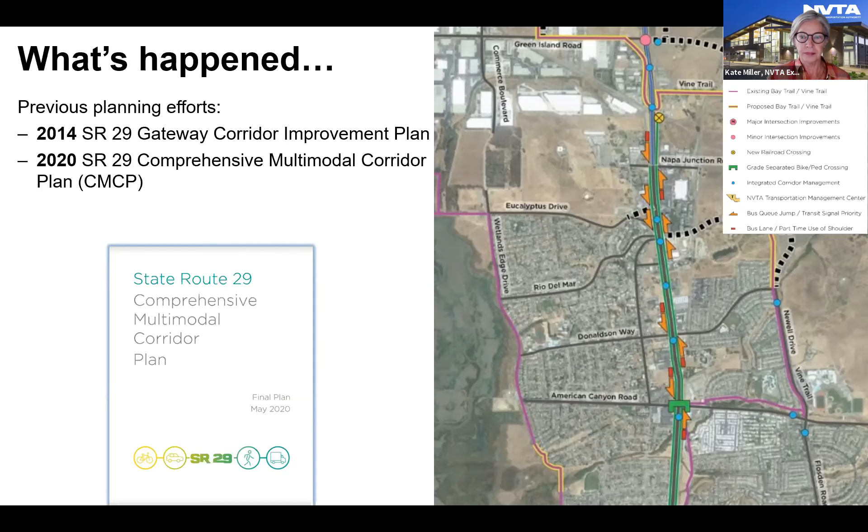Thank you, Kate. Hopefully everyone can hear me okay. Can you hear me okay? Yes, we can. Wonderful. Thank you, and thank you, Kate, for that introduction.

I'm actually currently on location here in Portland, Oregon, presenting American Canyon on a national stage at the City Manager Conference, talking about our sustainability efforts and sharing our community story with many other interested parties throughout the country. But this is such an important topic that I wanted to make sure I was available to at least provide some introduction. Our Public Works Director, Erica Smithies, will be with you for the remainder of the presentation to answer any questions that may come up. But I wanted to share two important points beyond what Kate had already mentioned.

The first is that all of the alternatives folks will see tonight provide an exciting opportunity for multimodal improvements, in particular bicycle and pedestrian improvements on both sides of Highway 29. The fact that American Canyon residents cannot walk north and south on the highway in a safe manner is really abhorrent at this point. Modern communities all have sidewalks and bicycle paths, and we really need these improvements on both sides of the highway. Safety is an issue, and all of these alternatives provide those pathways north and south on the highway, which is an exciting development as we look at projects moving forward.

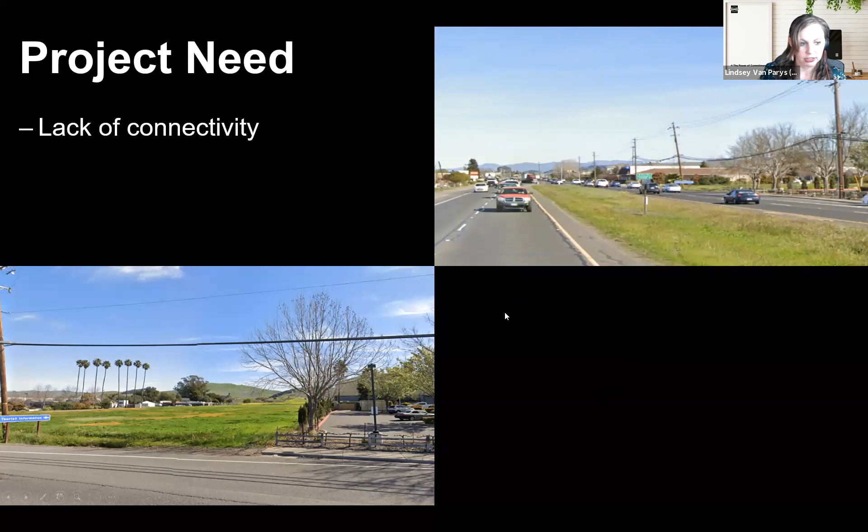Wonderful, thank you. Okay, so let's talk a little bit about the purpose and need of the project and some of the objectives. The project need: there's a lack of connectivity for all users. We've got gaps in sidewalk closures, as you can see on the right-hand side there. We have some challenges with roadway connectivity, and there's a lack of low stress routing options.

Low stress is a term that we engineers use for evaluating and looking at how a cyclist would feel on the road. With the volume of traffic, the proximity to moving traffic, and just the lack of facilities, there is a lack of low stress routing options for cyclists.

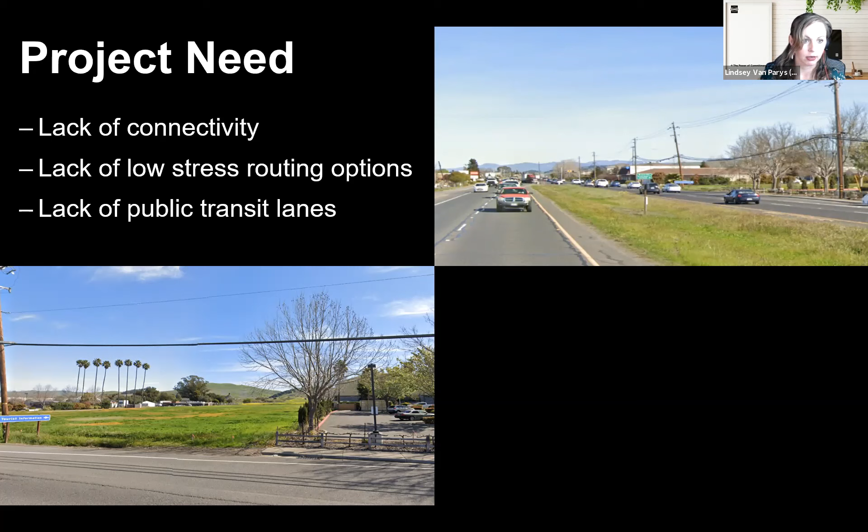There's also a lack of public transit access lanes, which leads to non-reliable transit in terms of travel time. So travel time reliability is a challenge because of the operations, lack of aesthetic benefits, regional traffic congestion, and constraints at the intersection that lead to significant queuing and stacking and impact that congestion.

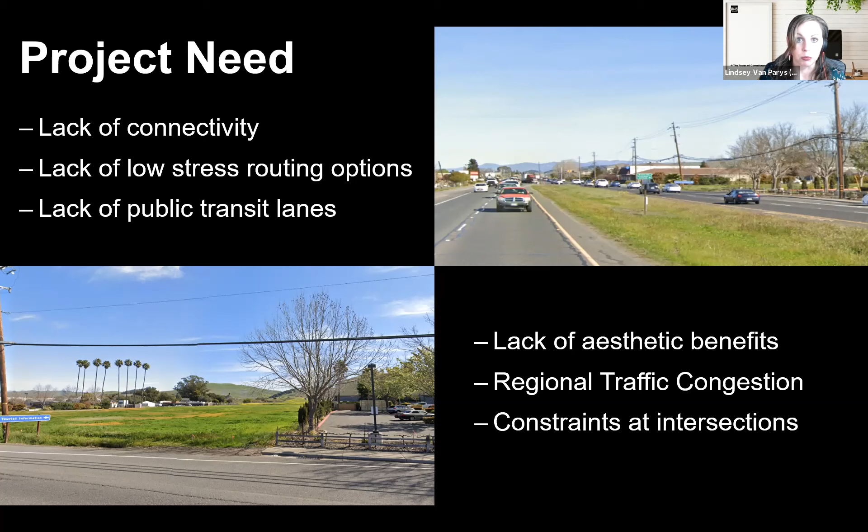Some of the objectives that have been set in the development of this project are improving mobility for all users, and improving safety for all users through Vision Zero. That's something Kate mentioned briefly at the beginning, talking about safety.

Vision Zero is a term that's been coined by the Federal Highway Administration and also a lot of other jurisdictions, including Caltrans, and that is the push to get to zero deaths and zero serious injuries on our roadway systems. So that is, again, that critical focus on safety.

Eliminate the overhead utility poles, which goes back to that aesthetics piece, and then further improving the overall corridor aesthetics, really making it a focal point and be the main street of American Canyon.

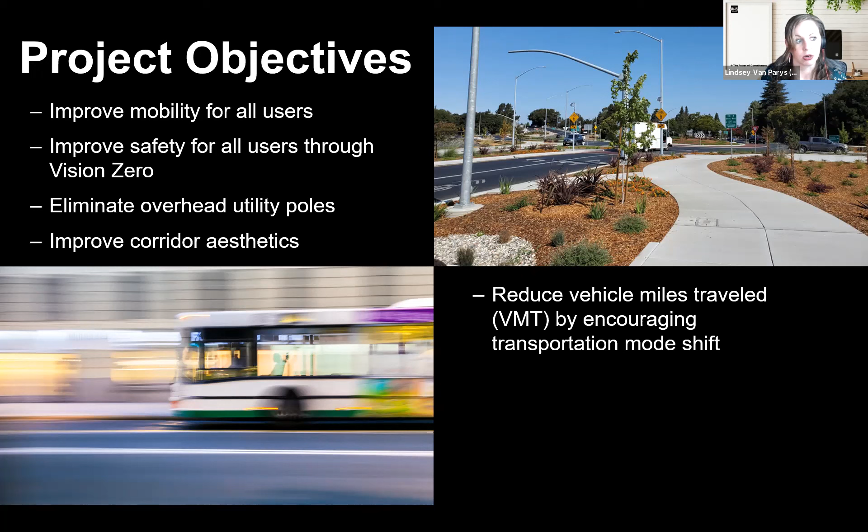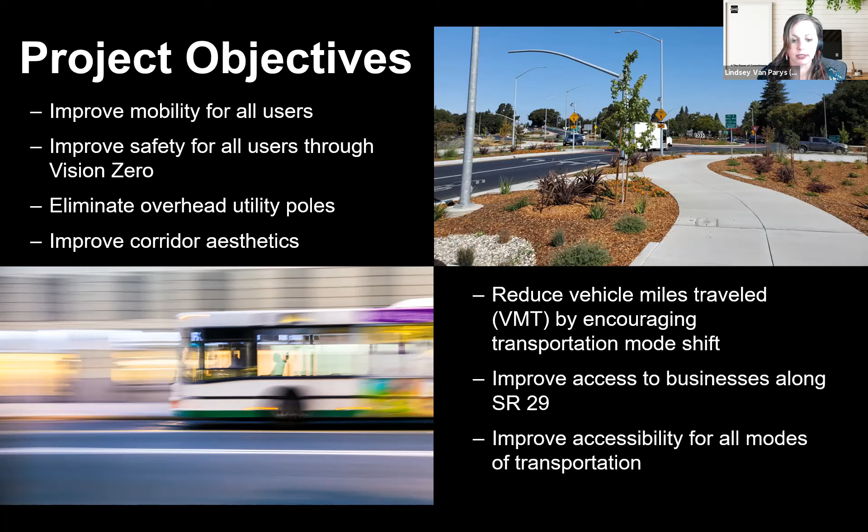Reduce vehicle miles traveled by encouraging transportation mode shift, so getting people out of their cars and using bikes or sidewalks to run errands for lunch, or use transit and then bike and walk the rest of the way. Improve access to businesses along SR 29 and improve accessibility for all modes of transportation.

Our project timeline and process: there was this project identification and development phase, which Jason and Kate touched on with all of these prior plans. Now we're in the project initiation phase, where we have looked at some technical components and performed technical studies.

Through those technical studies and understanding the needs and project objectives and looking at ways that we could meet those, we did an alternative development, looking at the various different alternatives that could potentially meet the purpose and need.

And then we are here at the draft project study report, where we have all of the preliminary technical studies done. We've identified the alternatives that can move on to the next phase. And then we'll move to the final project study report.

Now, in the project study report, we are not rejecting alternatives, we're not recommending an alternative. We're just saying these are viable alternatives and should have further evaluation. I'll talk about that further evaluation at the end of the process, which are the next steps. But we are at the draft project study report at this point.

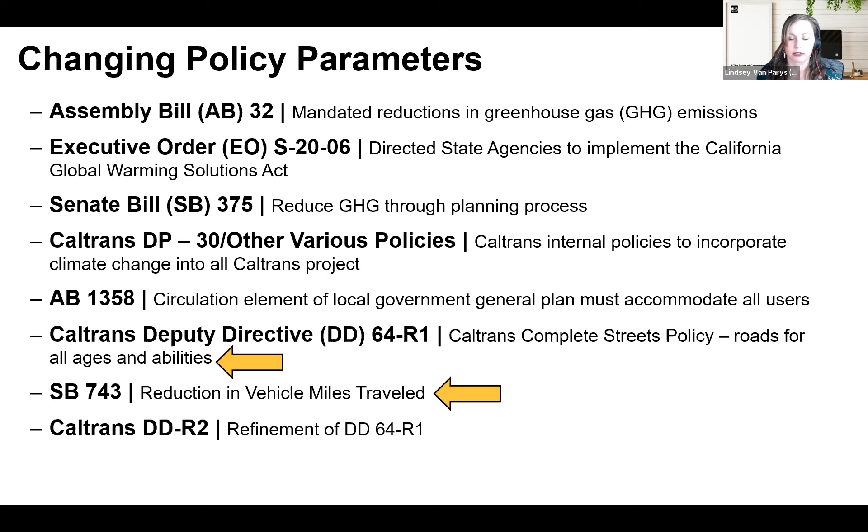So the reduction in greenhouse gas emissions, requiring circulation elements to accommodate all users, Senate Bill 375, reduce greenhouse gases through planning processes. So it's really just the next step in that.

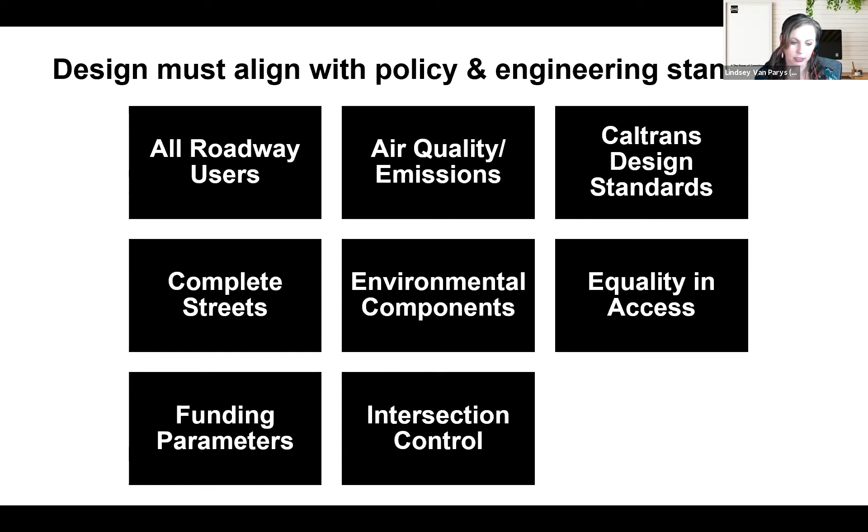Again, the funding parameters, intersection control—that is another piece of what does the intersection look like, and meeting the policies there. Caltrans has an intersection control evaluation policy that we went through on this project, which requires us to look at signals, stop control, which is not applicable in this case except on some of the side streets, and roundabouts. And then again, Vision Zero for safety.

Then other design parameters that we looked at that are really specific to this corridor are, again, part of that purpose and need, but access to local businesses, aesthetics, design vehicles—so can the big trucks that are going down there make it through our designs. Railroad requirements: there is a railroad running right adjacent to our improvements, and making sure that we're meeting the needs of those crossings. Right-of-way impacts: there is quite a bit of right-of-way out there today, but just making sure that we're taking into account any potential impacts the project may have.

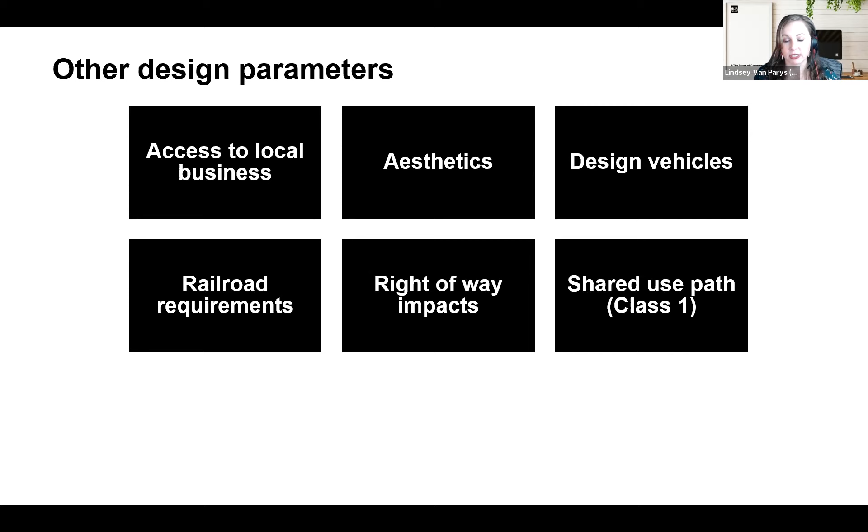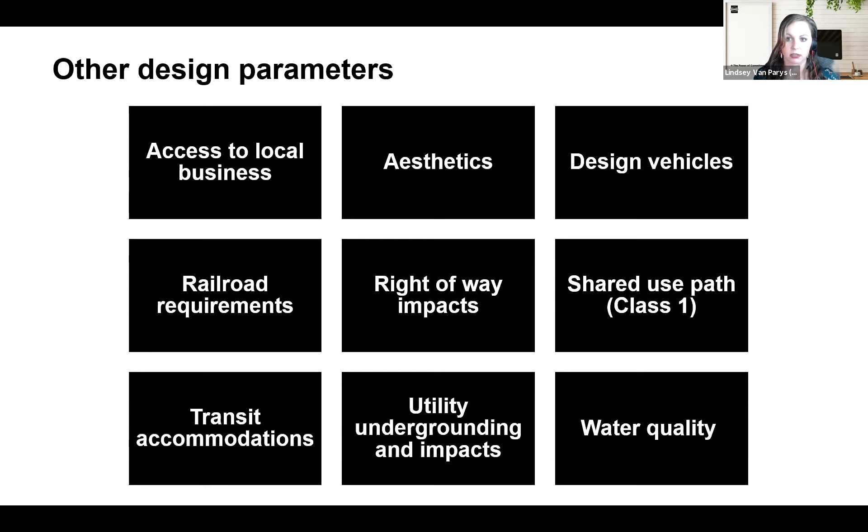A shared use path, or a Class 1 bikeway, based on the number of cars and the speeds on SR 29—we are required to put in a shared use path, which is a wider separated facility that is accessible by both bicycles and pedestrians. Transit accommodations, utility undergrounding—so all of those overhead lines being put underground, which will also tie back into aesthetics, but also looking at what are the underground utilities, are there big transmission lines down there that we can't impact, or different pieces like that. And then stormwater quality is also another key parameter. With any new transportation project, we have to treat the water that runs off the roadway before it gets discharged into our storm drain systems.

Now, safety is a big push, and some of the safety statistics on SR 29 within our project area were surprising to me. May not be surprising to everyone, but the number of fatal and injury collisions were 2 times higher than the statewide average within the corridor, and 84% higher than the statewide average for total collisions. So safety was one of the really key parameters here to reduce these number of fatal and injury collisions and property damage collisions as well.

So let's take a quick look at the alternatives. Our project spans SR 29 through American Canyon, starting at American Canyon Road and ending at Napa Junction Road. Some of the alternatives have some of the same characteristics, and I will point those out. We've got a legend here which gives you a key to what the map below shows.

Essentially, Alternative 1 is providing multimodal improvements, so there is no adding of lanes. It is focused on the multimodal and transit improvements, so maintaining the 4 lanes, but reducing the lanes to 11 feet, which will help with speed control and speed reduction. That will also minimize impacts to right-of-way, providing a separated sidewalk/bikeway in both directions, taking out that landscape median and constructing a paved median with the potential to add aesthetic qualities in there.

Widen the shoulders to 12 feet to allow for part-time bus on shoulder. Reconfigure and improve intersections along the corridor. By reconfigure, they're not major reconfigurations, just adding in additional turning storage, enhanced pedestrian improvements, and looking at the signal timing to revamp it to make it flow a bit better. And then construct a pedestrian undercrossing just south of Napa Junction Road.

As we look here, this is a table with a lot of information. Essentially, we are looking at changes. I'll flip back here for these two columns, the existing and the proposed. You can see we're proposing a new signal, or rather an enhanced signal, at American Canyon, Donaldson, Rio Del Mar, Eucalyptus, and Napa Junction.

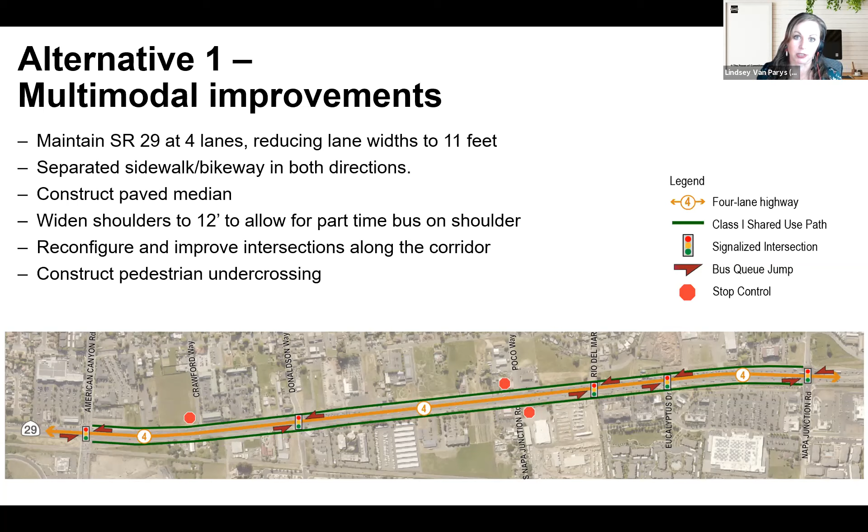And then we're also providing these bus queue jumps at the signalized intersections. What is a bus queue jump? It's essentially a red painted lane that is a bus priority lane, which allows the bus to jump past the line of waiting cars to get through the intersection, helping with that travel time reliability piece of the transit system. And then the enhanced crosswalk markings at every single crossing will improve the visibility of the crosswalks. That is also another opportunity to provide some aesthetic improvements within the look and feel of the roadway corridor.

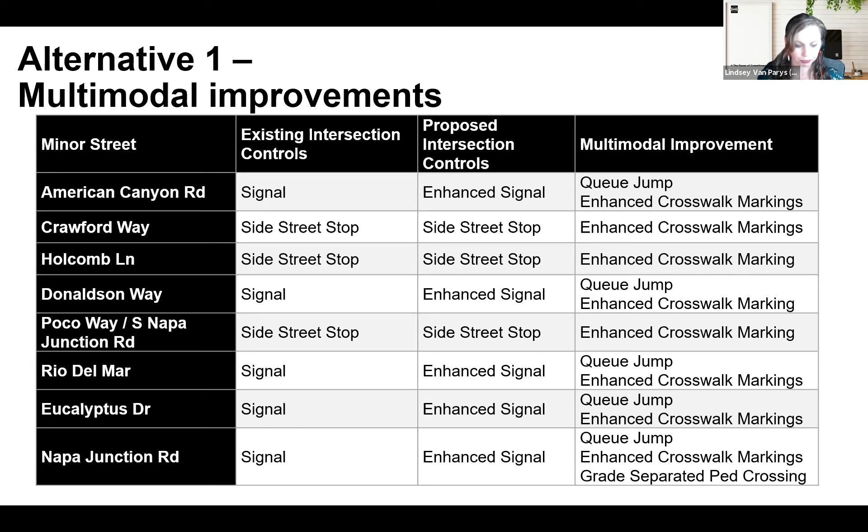Alternative 2 is essentially Alternative 1, but instead of signals, it's roundabouts, potentially a couple more roundabouts. American Canyon Road will remain signalized, and then the rest of the intersections will be converted to roundabouts. Again, it's a 4-lane roadway, reducing the lane widths to 11 feet, providing the separated sidewalk and bikeway in both directions, constructing the paved median, widening the shoulder for part-time use of bus in between the roundabouts, constructing 6 roundabouts, and constructing the pedestrian undercrossing as well.

Putting in a bus queue jump where feasible. Right now, we have identified American Canyon to have the bus queue jump, and then potentially looking at converting one of the lanes to a bus-only lane during certain peak hours. The roundabouts will be 3 lanes, so they will have an extra lane just through that circulating road, and I'll show you that a little bit later, and that is to enhance capacity, but it'll drop back down to 4 lanes after the roundabout and in between the intersections.

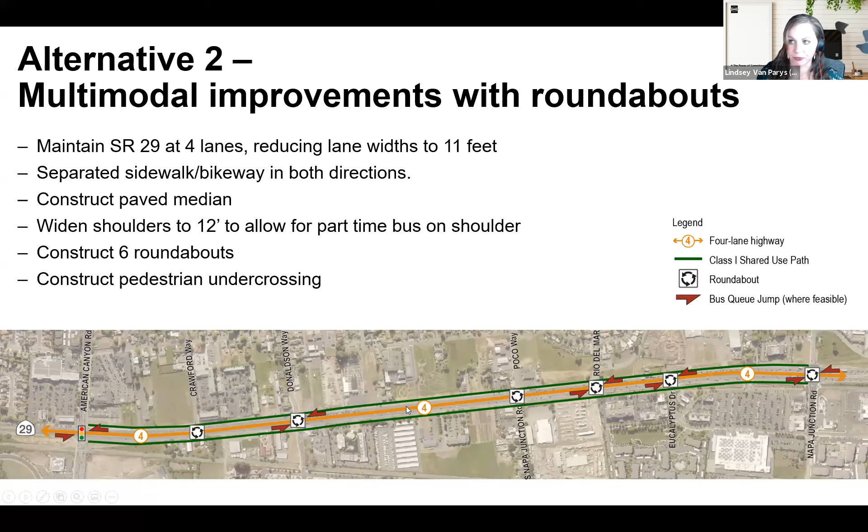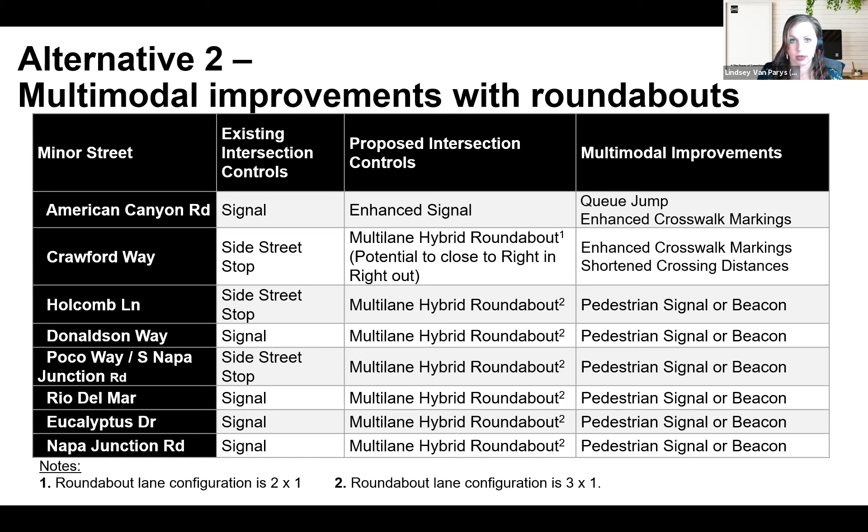Again, we're looking at enhanced crosswalk markings, shortened crossing distances, which is great because we're putting in median islands or pedestrian refuges. So pedestrians only cross portions of the road before, which improves operations, because when a pedestrian hits that signal, they have to cross the entire intersection, where with a roundabout, you only have to cross part of it. We are also looking at putting in a potential pedestrian signal or beacon at the crosswalks to further enhance visibility and safety for all users.

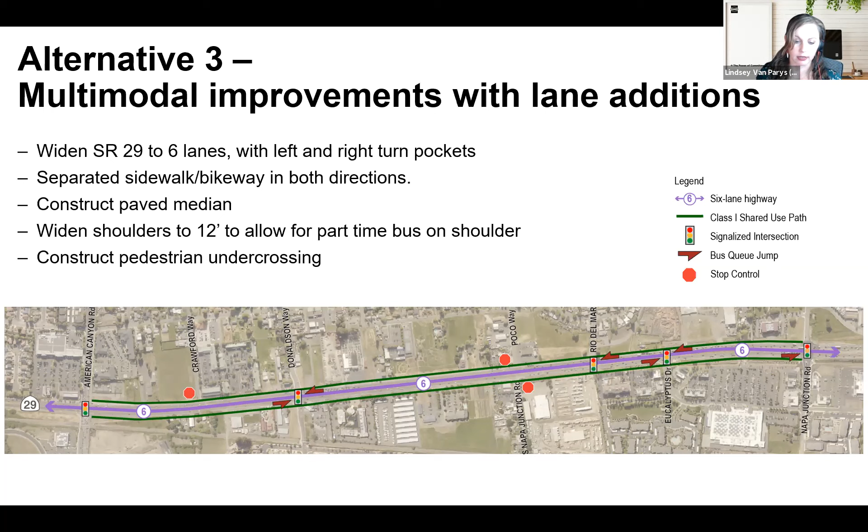Alternative 3 is the multimodal improvements with lane additions. Essentially it's the same as Alternative 1, but widened to have 1 additional lane in either direction on SR 29, and again including the pedestrian undercrossing at Napa Junction. Now this one, when we go back to those funding parameters, the ability to obtain funding to do this is challenged. So that is one thing we have recommended to take into account in the next round of analysis—the ability to obtain the funds to construct this.

Same things as alternative 1, with the queue jumps, enhanced crosswalk markings, and grade separation.

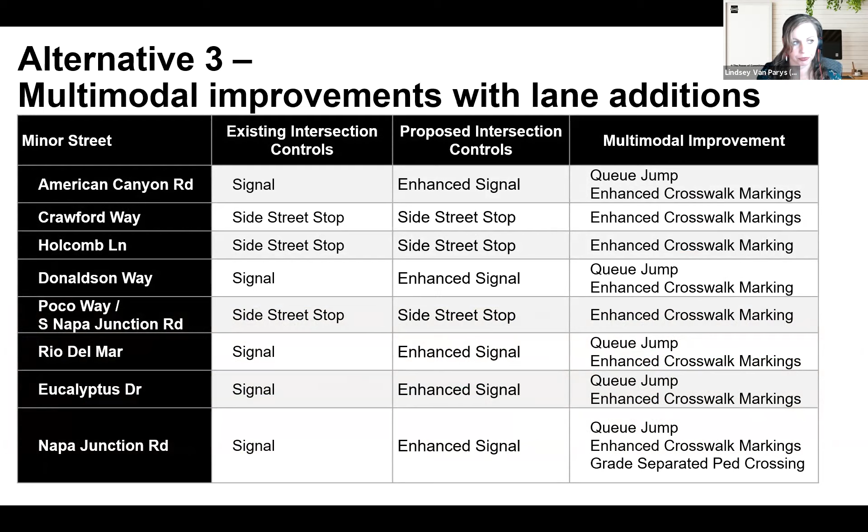Now looking at traffic operation comparisons, starting with vehicle miles traveled. We've got green, yellow, and red representing best, better, and marginal. Number 1 means the most positive advantages, 2 is better than now but not a significant improvement, and 3 is marginal to no improvement or negative. For vehicle miles traveled, the 6-lane alternative allows more capacity and would increase vehicle miles traveled, which is why it has a 3.

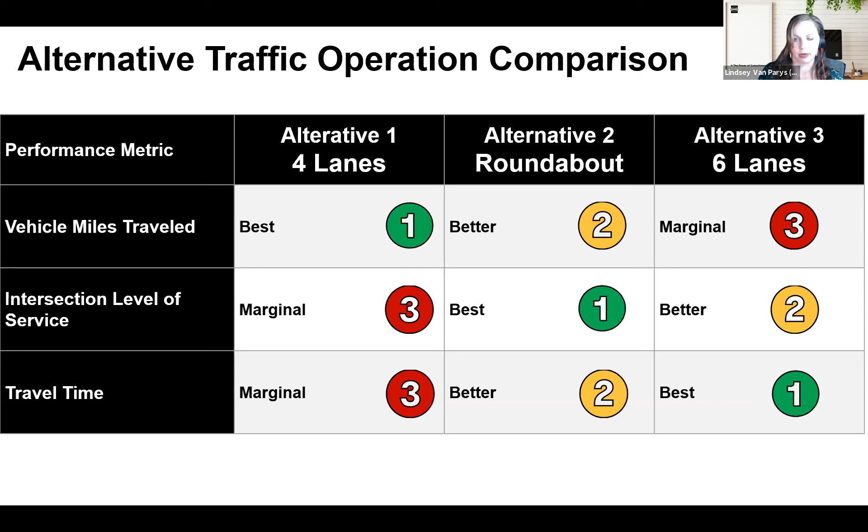Travel speeds: alternative 1 is better, alternative 2 is best, and alternative 3 is marginal.

Pedestrian crossing distances, same as explained earlier. The 4-lane would remain as it is today. Alternative 2 or roundabout would be best because we divide the pedestrian crossing time, while the 6-lane would add a significant amount of crossing distance.

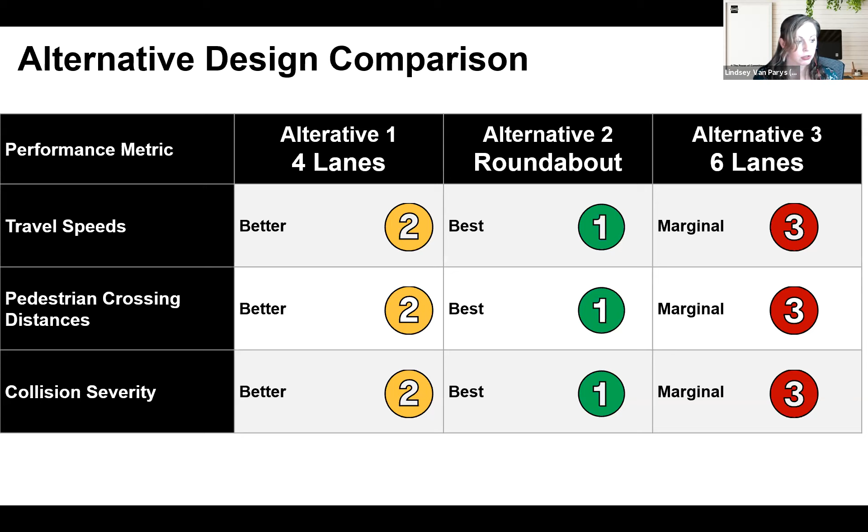Collision severity: alternative 1 would be roughly the same as today, and alternative 2 would be the best—roundabouts reduce broadside and T-bone collisions and reduce collision severity significantly, with about an 40% reduction in overall collisions and around a 80% reduction in fatal and injury collisions. For alternative 3, adding another lane to a signal increases the number of conflict points for both non-motorized and motorized users, increasing the risk for all roadway users and collision severity.

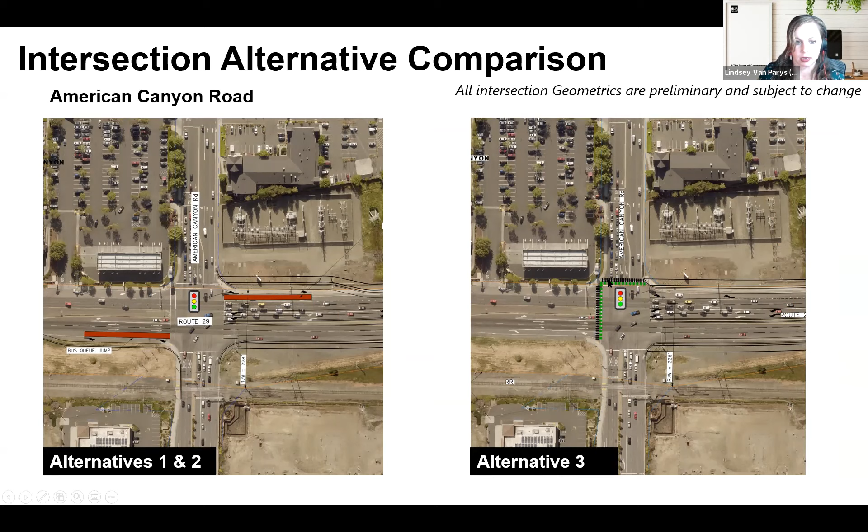This shows a potential example of what an enhanced crosswalk would look like. The green is the bike crossing and the black is the pedestrian crossing.

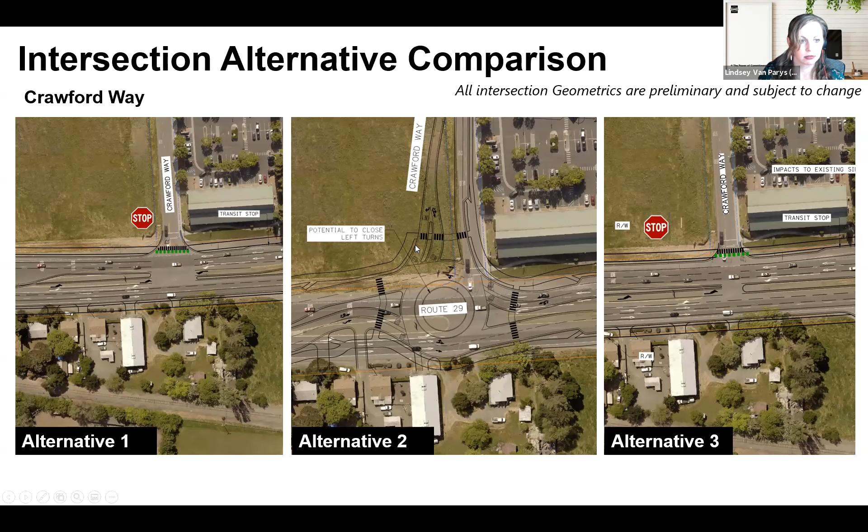This shows Crawford Way. In alternatives 1 and 3 it would be a stop sign. In alternative 2, we were looking at potentially adding a roundabout here, keeping it at 2 lanes through.

And here's our roundabout. It flares out to open up to 3 lanes in both directions—2 lanes coming through, and one being a through-and-right lane. You'll see we've got the right lane separated so that pedestrians have a little refuge there.

But they do cross 3 lanes of traffic on the exit, and it's the same for the approach in the other direction too. We've got the right turn lane, and then the 6-lane alternative, you still have your left lane.

You have your throughs, your bus queue jump, and your right turn lane with the shared use path. And the same here. We did look, because we're widening the roadway, at an option to add a 4th leg of a crosswalk. But during the environmental analysis, we'll need to determine if that is viable or warranted from a pedestrian crossing standpoint.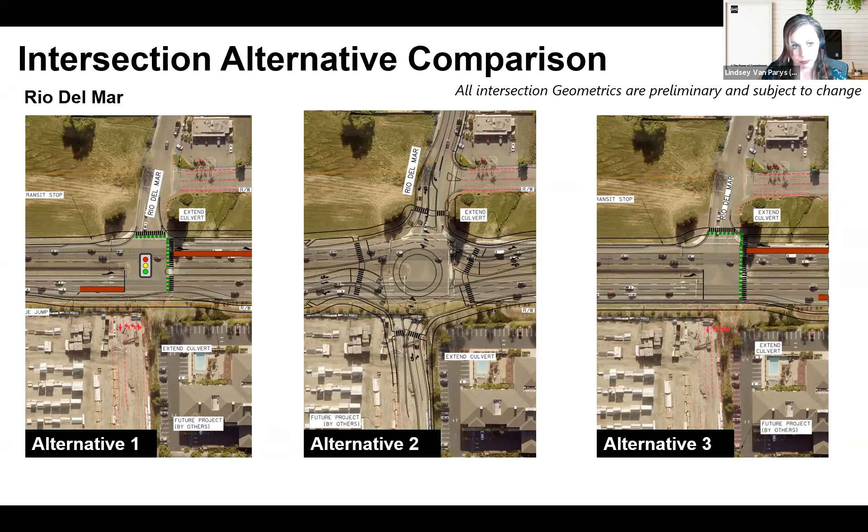Eucalyptus, same as shown here. We've got a future extension by others that would be a future project happening, which is not part of this project. Again, the roundabout and the project construction would end at the yield line at the top of the screen, and the future project would be required to construct the rest of the improvements.

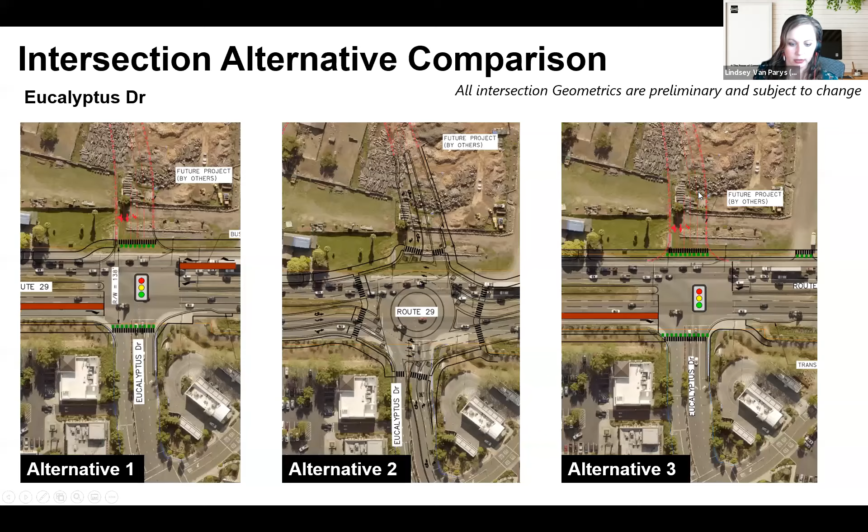Napa Junction Road. This is again the last intersection of the project. We are going from existing conditions on all 3 alternatives and transitioning to the project condition once we get through the intersection, adding the bus queue jumps, adding the enhanced crosswalks, and then adding the class 1 lanes on both sides.

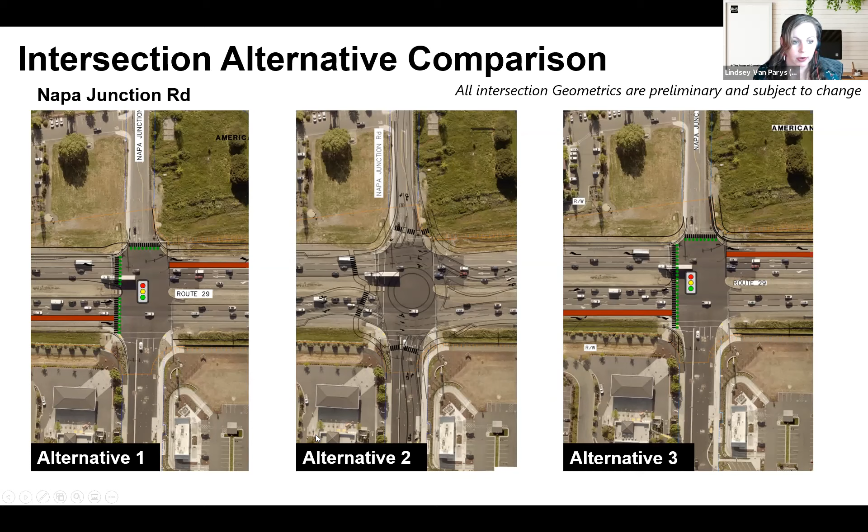The roundabout would also be 3 lanes. And then lastly, all 3 alternatives would have a pedestrian undercrossing. Essentially, the sidewalk or the class 1 shared use path would start dropping down underneath SR 29 and go under SR 29 and back around to provide a grade separated crossing of that intersection.

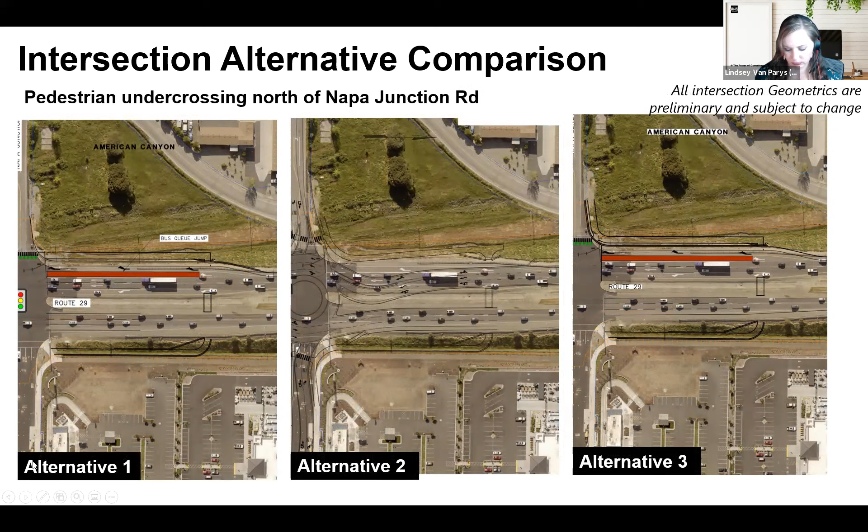No construction funding has been identified yet. The other costs to be incurred are amenities, so any street furniture, enhanced roadway lighting like decorative poles would add costs, environmental mitigation costs, overall long-term maintenance costs. Overall costs are subject to increase with inflation, but also the construction cost index has been fluctuating pretty significantly. So that is a potential future cost, utility costs, and then user costs.

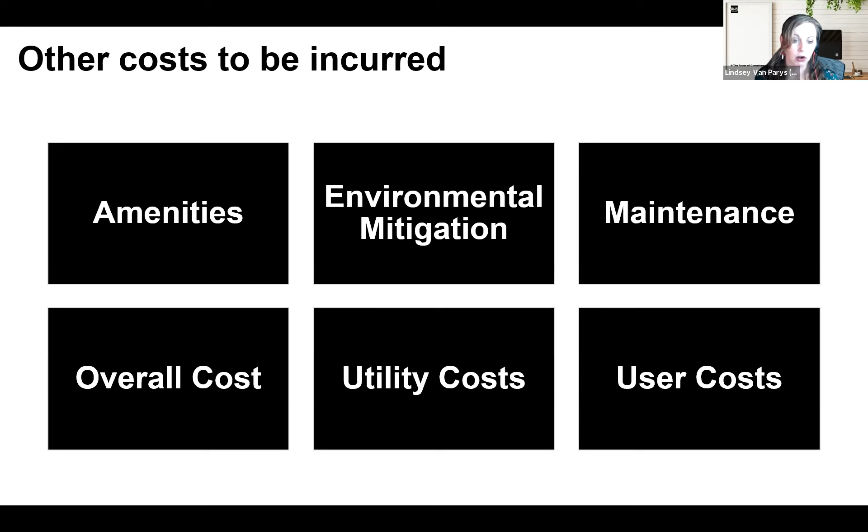What I mean by user costs is there is a cost associated with collisions - the cost to respond with our emergency personnel, the cost to clean that wreck up, the cost to replace the damaged infrastructure. There's road user costs, so what is the time that you spend on the road? There's costs associated with emissions for greenhouse gases and things like that. So there are a lot of other user costs that are factored into the overall life cycle cost of the project.

So next steps, the process and the future timeline. The project initiation phase, which is where we are now, is anticipated to be completed March of 2022. Then it will go to the preliminary engineering and environmental document phase. That is anticipated, if funding is identified and allocated, to be done in spring of 23, but may be delayed based on funding. In this phase, further evaluation and studies will be conducted for these 3 alternatives.

Then a draft environmental document will be circulated to the public. That'll be a 30-day public circulation period where all of the information will be provided as to what the analysis showed. They'll provide a detailed benefit cost analysis, all of that. Then once that has circulated, it will also produce a draft project report in concert with the draft environmental document, which is the engineering version of an engineering analysis of all 3 alternatives.

And then the final environmental document and project report will recommend a design alternative to move forward into the final design phases, which is funding dependent along with timing. That's where the detailed engineering design is done, full right-of-way is identified and acquired, and then construction, which again is funding dependent.

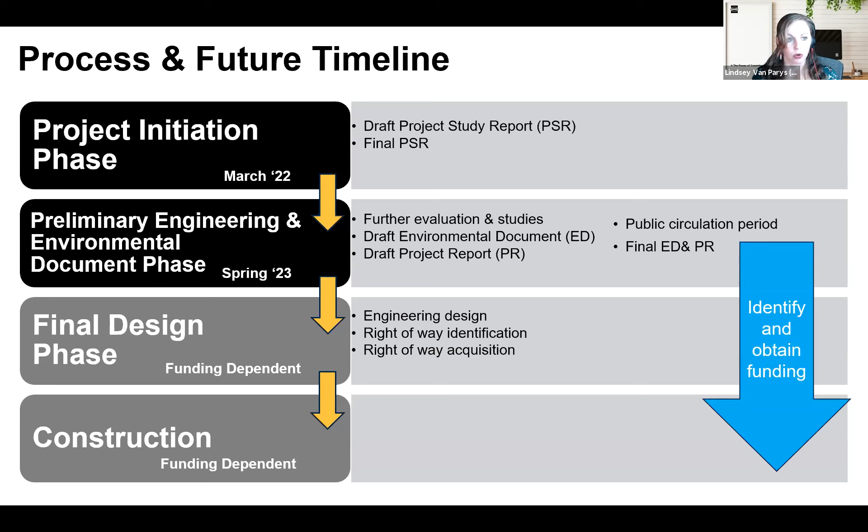We are in the entire process looking to identify and obtain funding, so we want to hear from you. We want to learn more and have you provide your comments. Comments will close on October 31st.

You can visit the project webpage to get more information and also access our Social Pinpoint interactive map, which is a great place for you to put specific comments. I'm going to pop that open really quick and show you where that is.

There will be a link on the project page, which will come back up again, so you can jot that down. It'll also be placed in the chat. But we have this interactive map.

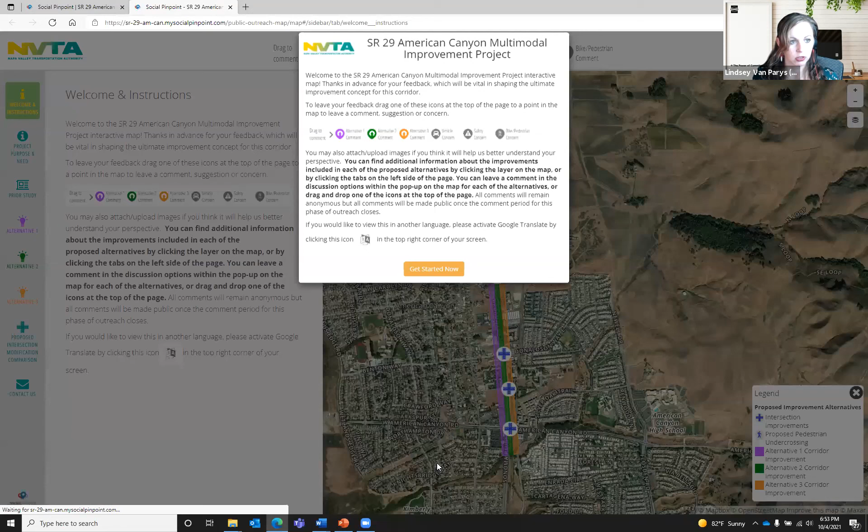You click on it and just hit get started. These are the welcome and instructions. And then you can also use Google Translate to translate this into any language that you need.

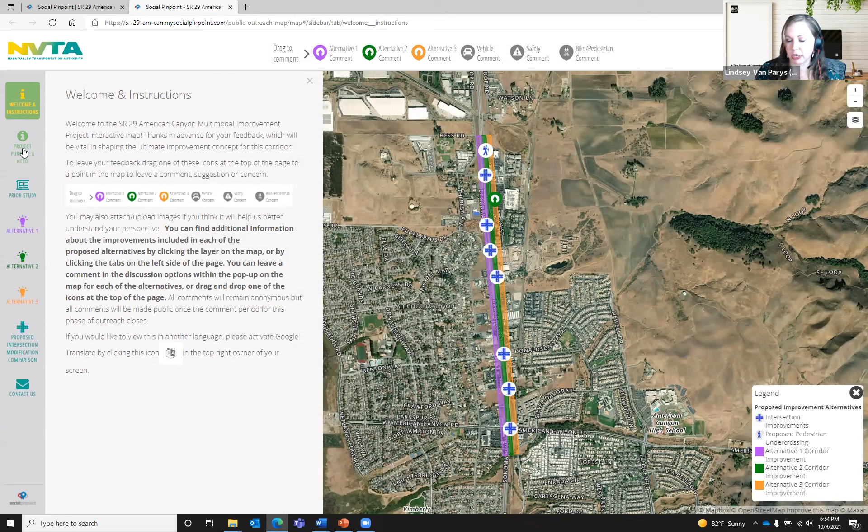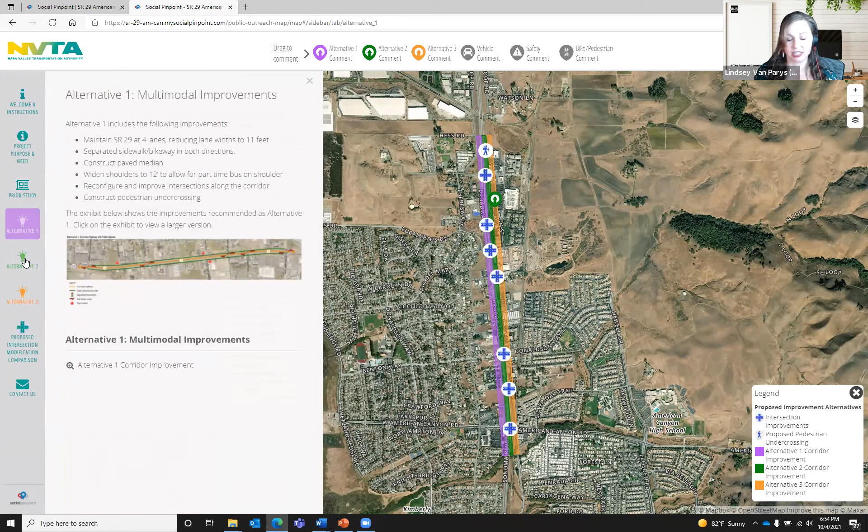Here on the left-hand bar, there is project information and project facts. So you can look at the purpose and need, look at the CMCP that this was built on, and it includes the images and details that I presented today on all three alternatives. It also provides a description of what the intersections are that are being modified.

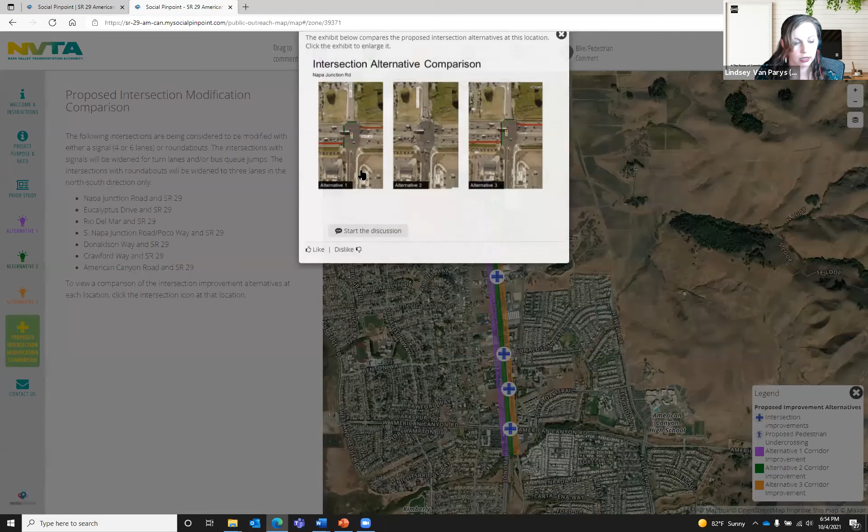If you click on these here, it shows the exhibits that I showed today, so you can take a look at each one of those. And these color-coded alignments you can see on the side - we've tried to color code everything. So if you click here, you can see the alignment again.

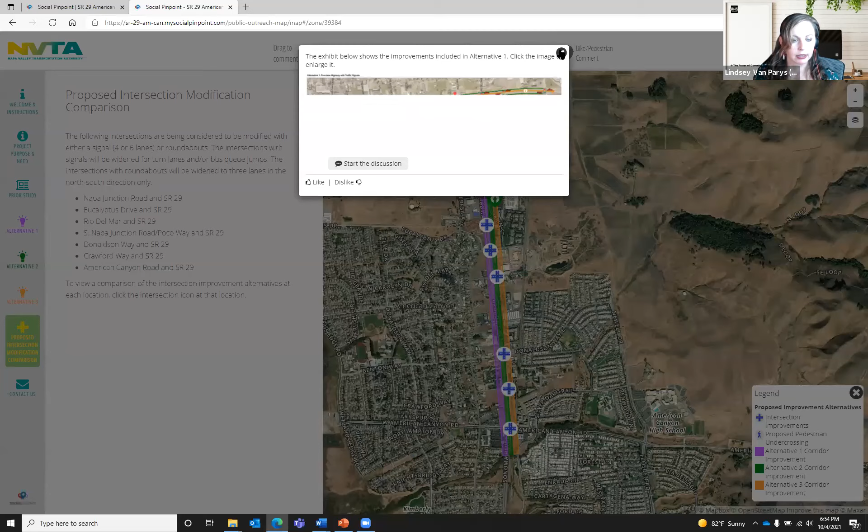We encourage you to put in your comments - you simply drag, drop, and type your comment here. We ask that you put in your email address so we can respond to you and make sure we capture your comment. If you have something you want to attach, that is an option here as well.